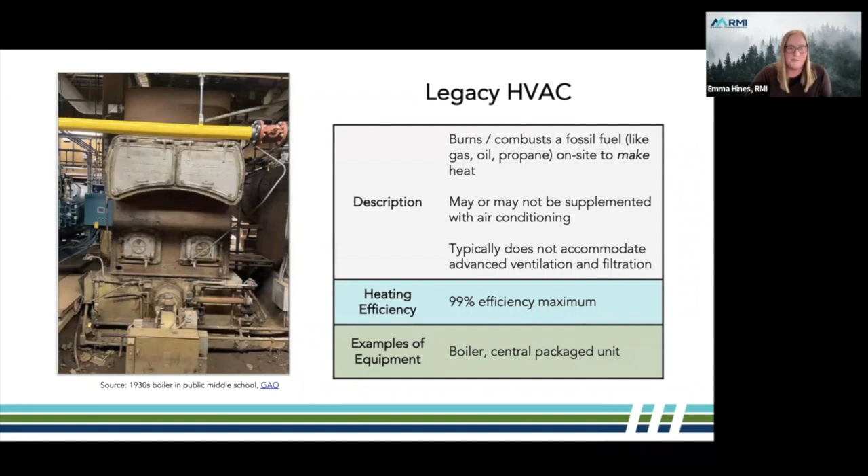On the other hand, though, modern systems, instead of making heat, they move heat that already exists in the air or in the ground. And by using this approach of moving heat, we can both heat and cool our indoor spaces with just one really cool piece of equipment, and that's called a heat pump. This approach doesn't involve combustion of fossil fuels. It can be powered with clean, renewable energy, and it's vastly more efficient than burning fossil fuels, and it does a better job of ventilation and filtration.

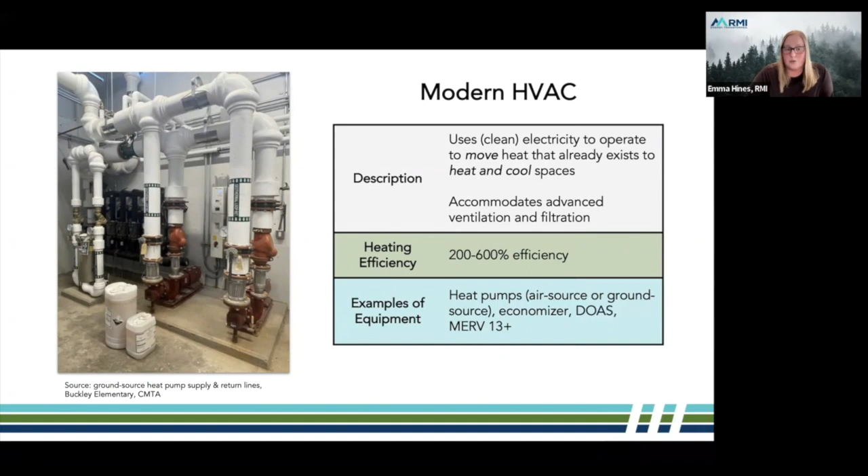This transition to modern equipment is already happening in leading schools today, which you'll hear about in a little bit, and it really is the future for all schools. Next slide. So I'll wrap up this background by sharing that there are 3 key messages that we want to deliver in today's webinar, and each of our guests will speak on a portion of these messages.

So the first big one is that transitioning to modern HVAC systems is critical to student health and learning. Our second message is that over the past few years, and especially now with the passage of the Inflation Reduction Act, the economics are changing in favor of all electric and high performance HVAC options. And then third, which is really exciting, is that we already have fantastic examples of how states and jurisdictions and school districts are taking action on this transition.

So now, with all of that background in mind, it is my pleasure to hand the mic over to our first speaker, Dr. Erika Eitland, who is a true expert in connecting building quality to student health and performance. And she is going to dive deeper into this first key message for us. So take it away from here, Erika.

Awesome. Thank you, Emma. Hi, everybody. I get to be sort of today's hype woman, I think. So my name is Dr. Erika Eitland, and I'm the director of the Human Experience Lab here at Perkins & Will. And much of my research is focused on how K-12 buildings impact child health and really what do we do about it. So to kick us off today, I'm going to go into 2 critical questions. First, the why now and why HVAC. So we're going to get into it.

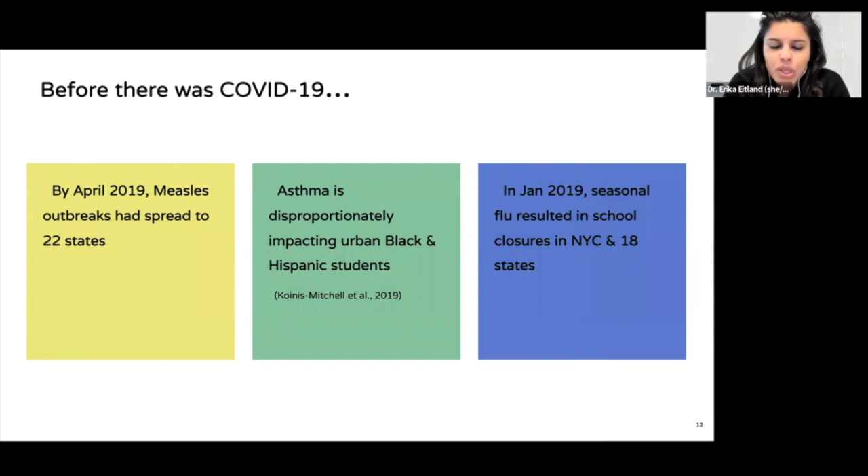So this is a really important time for us to think about, well, what is this evidence and what do we do about it? So next, let's get into the sort of why now from a human side. We all fall into the trap of maybe prioritizing the building, but it really comes down to people. And so when we think about improving our students' environmental quality, it's going to have a lasting impact on their growth and development. So every decision we make now actually helps when we think about the fact that by the time our students graduate 12th grade, they've spent 15,000 hours in their school building, their lungs have continued to develop and sort of function in a certain way.

We know that kids are breathing 50% more air. And so all of these aspects are leading to sort of an increased susceptibility that we need to be thinking about. This isn't just an office building. This is really something where the people who occupy this space make this an important priority.

We have seasonal pollutants, things like allergens, pollen, even just wildfires that we know can track across the United States. And then even the siting of the building. Is it located close to traffic, major airports, other sort of waste sites as well? So these are just important factors for us to be considering of, okay, there's the soup around us and how are we going to respond? And that's on our next slide, is really thinking about ventilation and filtration as a true spectrum. So there's 3 main goals of ventilation. One is to just control and remove some of those airborne pollutants.

The second is to dilute indoor air with fresh or clean air. And that's the assumption that the outdoor air is cleaner than our indoor air. And then the third is managing temperature and humidity. So these are opportunities for us to think that it's not, well, do you have ventilation? There's lots of nuance in that conversation that we'll get into today.

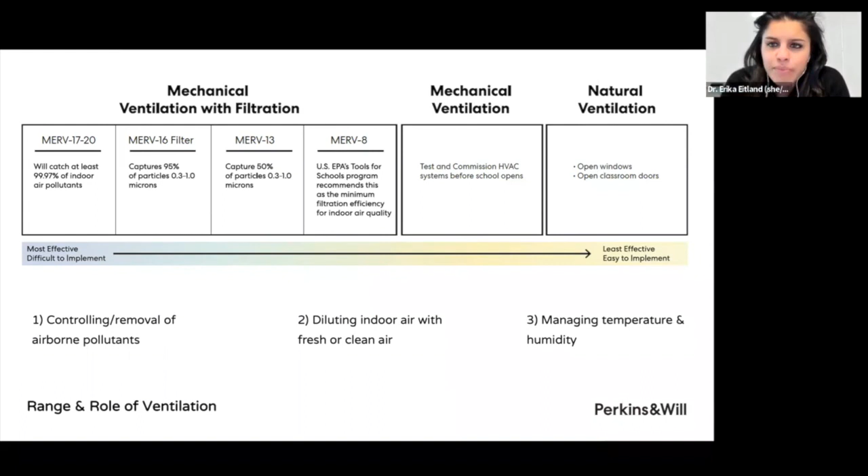So if I look at the next slide, what we see is that African American and Hispanic students, as well as free and reduced lunch students, are experiencing high levels of indoor temperature. So this isn't just about the pollutant side, it's also about the temperature that they're taking their tests. And so what we find is that compared to their white Caucasian counterparts or their more affluent counterparts who are typically in that optimal temperature for test performance, we see that there's this discrepancy. So when we talk about HVAC, it's really also an equity piece.

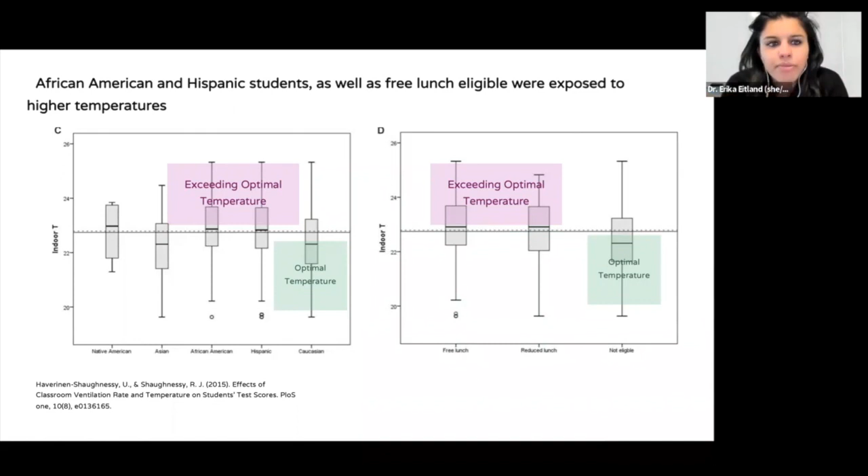And so to nerd out a little bit more on thermal comfort, on the next slide, one thing I would like us to start thinking about, and this was really critical in the Healthy Buildings work at Harvard with Joe Allen, was really shifting our conversation around thermal comfort, which is really just a subjective measure of how hot are you in this space? Are you comfortable in this environment?

And really acknowledging that children have higher baseline metabolic rates, they have higher core body temperatures, their ability to acclimatize is not the same. And so when we even think about how some of these standards were created, like ASHRAE 55, we find that they're not maybe meeting the needs of a very active third grade class, perhaps, and that they were based on men in three-piece suits. So we have to shift our thinking to something around thermal health. And so this is an assessment that's bringing in some of those personal factors, clothing and metabolic rate and physical activity.

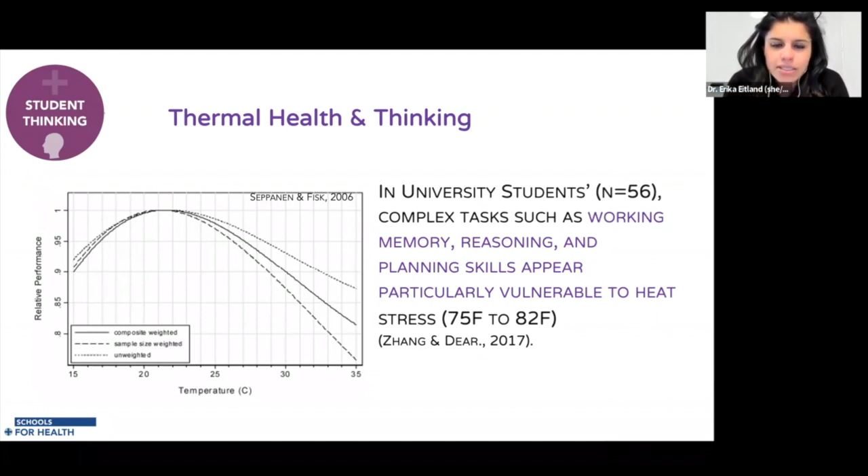And to me, on the next slide is really when we think about it in the context of climate, there's this important piece here, which is that in a study of 75,000 students, they found that students taking an exam on a 90-degree day versus a 75-degree day were 12% more likely to fail that exam. And so this is equivalent to the Black-White achievement gap. So we have a real important focus here, where if we think about the average life of a school building, how many 90-degree days are in our future? And so with that, I want us to get into the action.

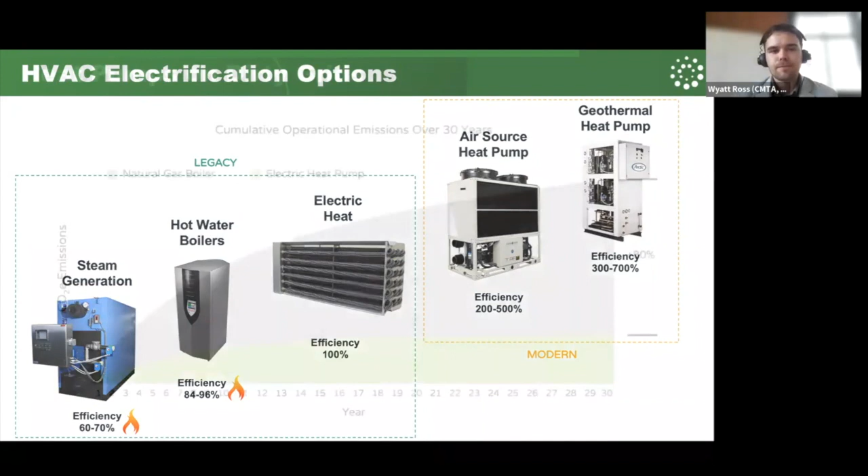And so when we look at comparing these technologies from an operational emission standpoint, because you're probably wondering, just because I electrify, where is that electricity coming from? There's still emissions associated with it. So what this is looking at is if we take a sample school in a region that currently has a fairly dirty grid, using mostly coal-fired power plants to generate electricity, and we look at switching between a natural gas boiler that's generating heat at the building versus an electric heat pump, what are the total emissions of those two systems, including the emissions from electricity?

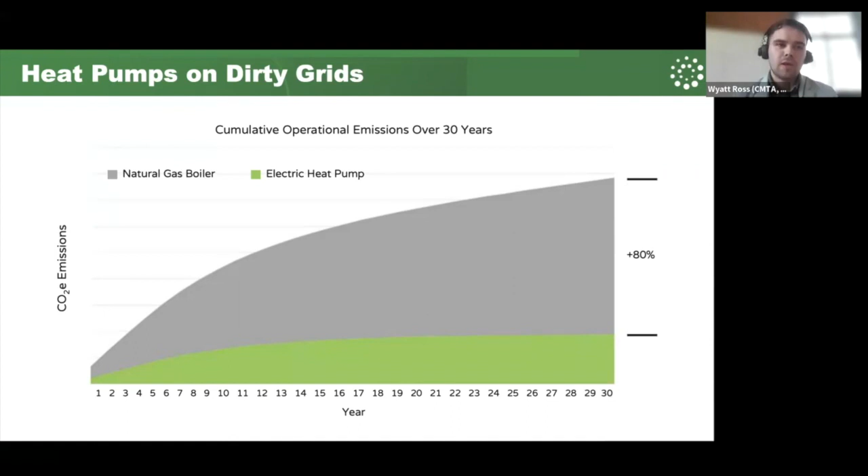And so what we see is over a 30-year period, as we expect our grid to deploy more and more renewable energy and become cleaner over time, by the end of those two systems' life, a school that deployed electric heat pumps can expect to reduce emissions by almost 80% compared to a school that chose to use a natural gas boiler starting today. And so this just gives you a sense of the scale of greenhouse gas emissions an electrified new technology HVAC system can save. Next slide.

So all that said, you still have to pay for these systems. And so how do we do that? I think it's really important to be aware of the recent legislation that has passed. I'm sure most people have heard about the Inflation Reduction Act at this point. There are two big things that I want you to take away from the slide, and then you can use the rest as a reference.

But the big thing is that in the recent past, these tax credits have existed in some form or another, but they have not been available to public K-12 schools. And so that has changed with this legislation. So now there are incentives available that can help cover the cost or any premium associated with these modern technologies.

And then the other big change is that for some of these technologies, the tax credit base has increased from 10% in the case of geothermal heat pumps up to 30%. And there are additional incentives that can potentially raise that. So what that means is that not only can these heat pumps and modern technologies meet a lot of the technical needs of heating and cooling, but they can also meet some of the financial needs that districts are facing. Next slide.

So again, we won't go into all of the technologies that are covered by this bill, but really the big one for our conversation today is ground source heat pumps. Also solar photovoltaics are covered, battery storage, some microgrid technology, and a whole slew of other technologies that we won't have time to get into. Next slide.

And so just real quickly, I wanted to jump into a case study. This is a school that Sarah mentioned that we worked on in Connecticut, a net zero energy renovation. It did not leverage the tax credits, but this case study proves out what it would have looked like if they had, and how beneficial that could have been. This is a life cycle cost analysis over 25 years. If we just compare to a code minimum system that we could have deployed, it would have cost roughly $13 million over the course of that system's life to own and operate.

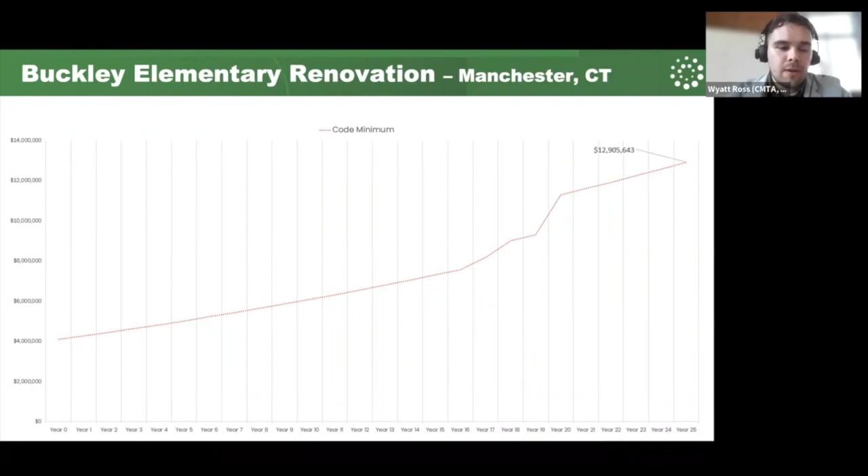And so if we compare that to the geothermal system that they went with on the next slide, you can see that we were able to provide them with a system that had almost a $3 million savings over the course of the system's life. The only downside is that it did have a small premium associated with going with that HVAC solution, and that was going to result in a 6-year payback.

And so the key takeaway here is that before the tax credit, this HVAC system still made a lot of sense and had a lot of merit for all the health reasons that Erika was talking about, as well as the energy savings associated with the system. But with the tax credits, it almost becomes a no-brainer: first cost, best option, and then all of those ancillary benefits as well. So this just shows the magnitude of impact these credits could have when looking at these options. Next slide.

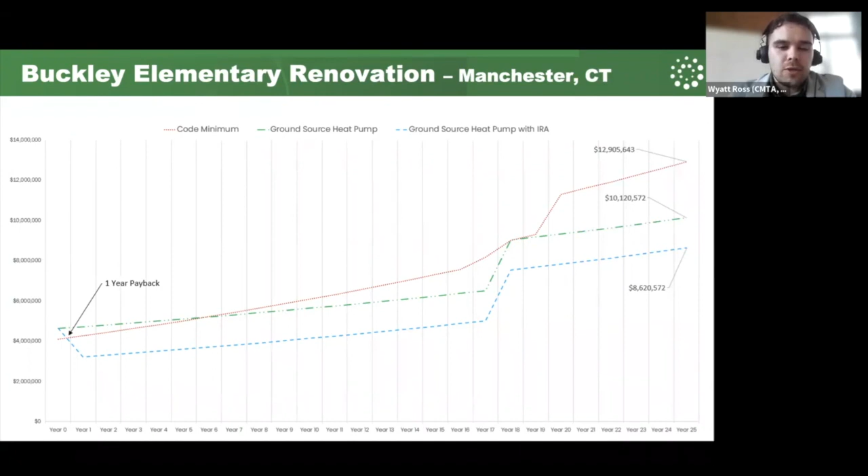So, quick sustainability playbook here. How do we actually go about achieving and implementing these systems? When you have a project come online where you're looking to maybe do an HVAC retrofit or new construction or whatever it may be, step one is that we really need to make sure that we're asking for the right qualified people that can design and deliver these systems. So including language in our RFPs that talks about performance outcomes, whether it be the health and wellness outcomes, the energy savings, the system types. If you're asking the right questions in the RFP, you'll bring people to the table that can deliver those solutions.

The second thing is during design. Design of any school can be messy. So you have to have advocates both on the design team side, with the architect, the engineers, structural contractors, and on the school district side that can continue to ask the right questions, make sure that we're talking about the right things and that we're focused on achieving those objectives that we talked about today.

The third thing, and this one's really important: as we transition to more and more modern systems and away from traditional systems where contractors and estimators are more familiar, that transition can be a little bit of a pain period. Estimators, if they aren't super familiar with these new systems, might put in some buffer or safety factors associated with the cost of these new systems, and that can inherently price out these systems, maybe unintentionally. So what we want to do is make sure that we're getting early pricing sets that are very detailed, dig into the weeds and make sure that we're getting the right information so that we're not making any assumptions that might be wrong and falsely price out systems that we would like to keep.

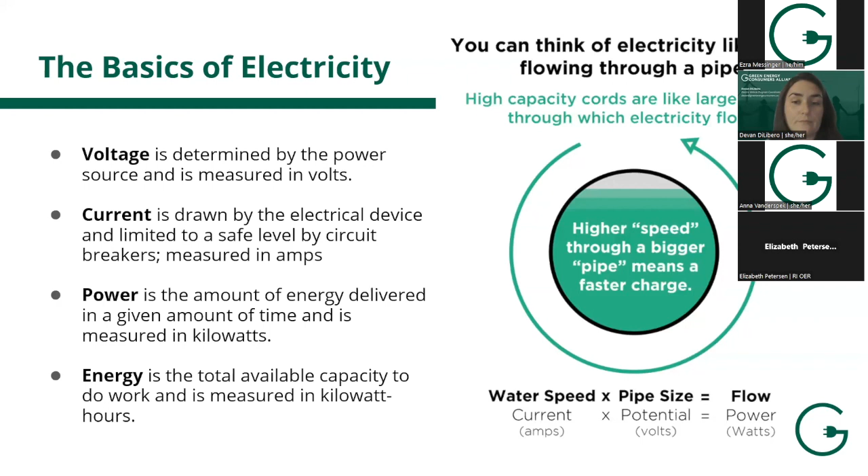Next, we are going to talk about driving range and charging speed because they're the two biggest questions that people have of electric vehicles. The first is how far can I go? So the size of the battery determines how much energy you can store in the car. The more energy, the more driving range. Efficiency describes how good the car is at converting energy into miles driven. Bigger cars are usually less efficient, but efficiency can vary depending on road conditions, driving style, and how fast you drive.

Unlike gas cars, EVs are more efficient at city speeds and stop-and-go traffic. The weather. It's surprising how big of an impact the ambient temperature makes. Batteries have an ideal operating temperature. In the winter, you need to use energy from the battery to keep it at a correct temperature, which cuts into the range. In the summer, however, when weather is nice, you'll get way more miles out of your car than is stated by the EPA estimated range for any particular vehicle.

The second one is how fast can I charge? Power source. Charging is basically the process of transferring energy from an outlet to the battery for storage. So the power source is a major factor that limits how fast you can charge. You can't draw more power than is available from the source.

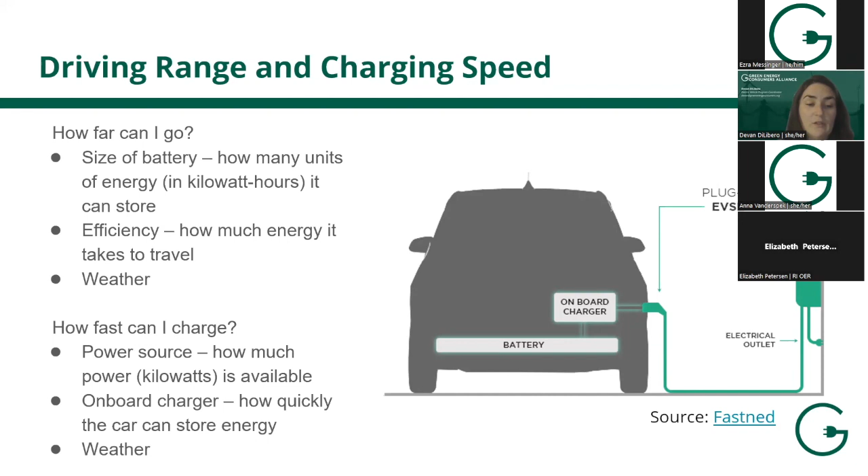Before energy can be stored in the battery, the power has to be converted from AC power, which is the power that the outlet spits out, to DC power, which is the power that the devices use. That's what the onboard charger does. So even if you're plugged into a charging station that delivers a ton of power, the car can only process all of that power so quickly. And this is especially important to think about when it comes to DC fast charging, which we'll talk about in a little bit. And if you have any more questions on this, please feel free to put them in the Q&A. Finally, weather affects charging speeds too, in the same way it affects driving range.

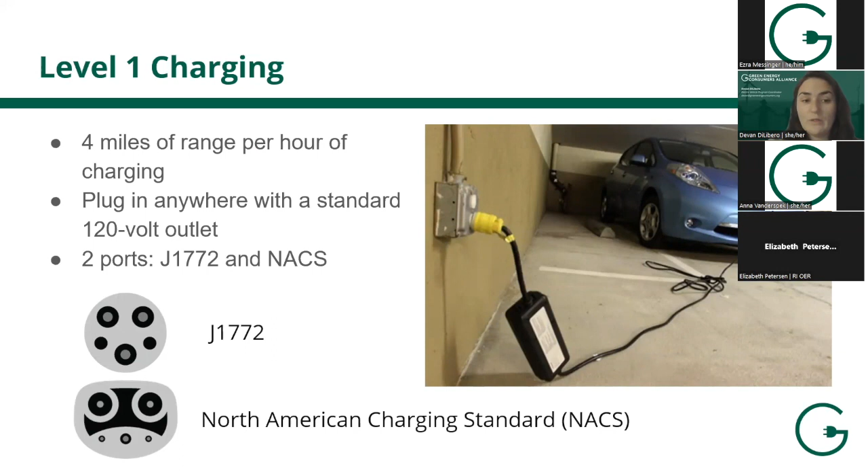This is important to know because it kind of helps you figure out what your driving needs actually are and what your charging needs are. And as a reminder, you're not going to be sitting there with your car. It's going to take you like 10 seconds to plug it in, and then you're going to go about your day or your night. So it's really not too much of an inconvenience.

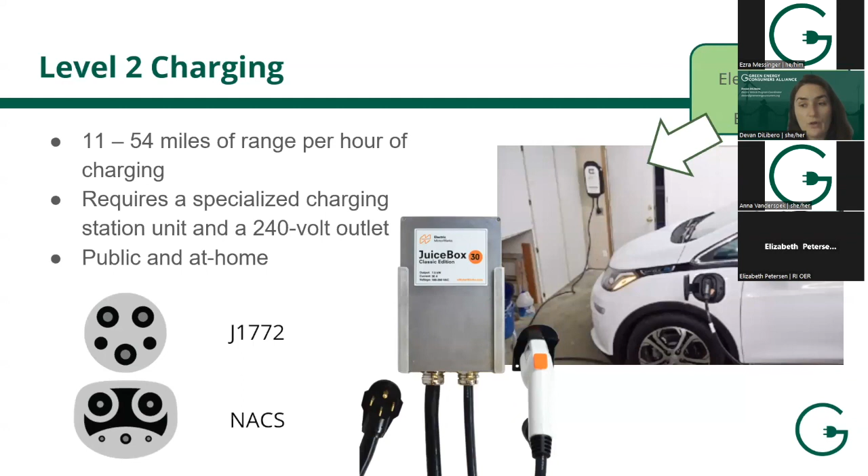Now, here's what I was referencing before about the Tesla Charging Partnership and the North American Charging Standard, or NACS. So like we said before, Tesla uses one port for all 3 levels of charging. And in the last couple years or so, they took the patent and opened it up for their charging port in the hopes of becoming, like the name states, the North American Charging Standard, so more manufacturers would adopt their charging ports.

So far, we have quite a few manufacturers who have agreed to adopt the North American Charging Standard port, and those are Ford, Rivian, GM, Acura, Fisker, Mercedes-Benz, Nissan, Honda, Jaguar, and Polestar and Volvo. Now, this is going to change. It's probably going to be a list that grows very quickly over time, but for right now, these are the manufacturers who have agreed. What this generally means is that most of these manufacturers will follow the following timetable.

In spring of 2024, all of these manufacturers listed will have adapters available for their vehicles that are currently on the roads, which means that they can use any of Tesla's 12,000 plus supercharger stations across North America, which is huge because a huge advantage of having a Tesla is the charging station network. So it opens up a lot of different charging opportunities for folks who wouldn't normally have that. I mean, the charging infrastructure without NACS is pretty extensive, but this is even greater and it gives you more opportunities for charging.

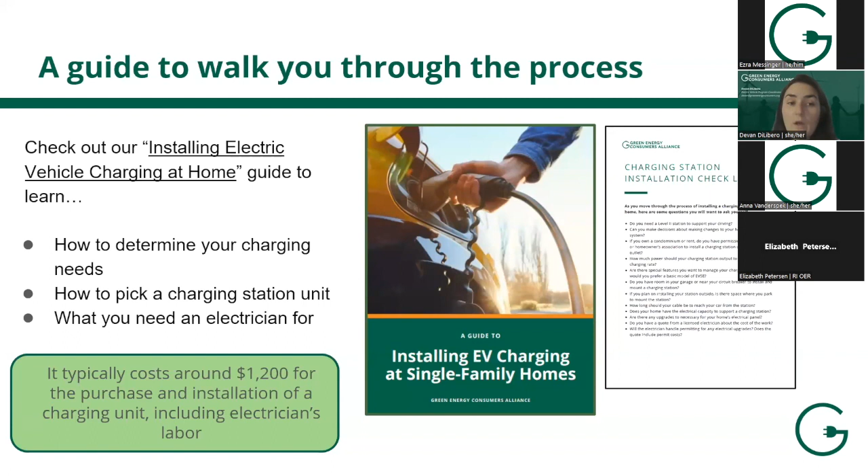And then we'll also tell you what you need an electrician for, and you do need an electrician for this, but it's not a super cost prohibitive thing to do. With the electrician's work and the cost of the unit, it should only cost you about $1,200 for the whole process. Now that's with no other electrical issues that need to be fixed in order to install this. So it should be fairly simple. Next slide, please.

And now you might be thinking, well, that's great, but I don't live in a single family home. I live in an apartment or a condo. We also have a guide for you as well. This is something that you can hand to your landlord or whomever to say, this is why it's such a great amenity. This is why you should install it for us. And we also have another guide that tells the landlords how to go about this process and if there's any incentives that they can take advantage of to install these charging station units for their residents. And I believe I'm going to now hand it over to Anna.

Thanks, Devan. Before I jump into the next slide, I'll say that there are existing incentives and new incentives coming soon to help bring down that cost of installing charging, and we'll talk about that later. So don't fret. There's ways to bring that $1,200 down. But first, at this point in the conversation, we often get the question, how much does it actually cost to charge?

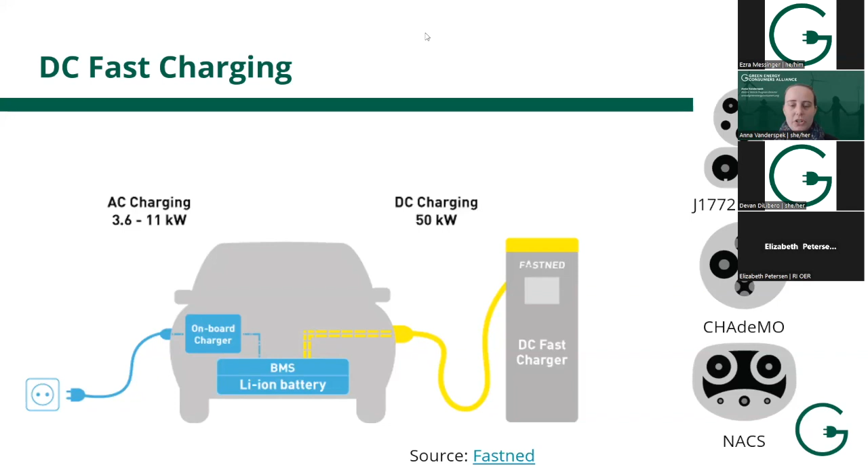Moving forward, a lot of the new vehicles that are going to come out are just going to have the North American Charging Standard, which is a good thing in the sense that it's simplifying. We won't have to talk about 3 different plug types anymore. It'll just be, this is the DC fast charging plug for most manufacturers.

Often the question we get with DC fast charging is how fast is fast? And the answer there is that it depends, of course, as always, on lots of different things. So the first thing that matters is the station power. So a lot of the charging stations that are DC fast charging stations that were built in the last couple of years were somewhere between like 50 and 70 kilowatts. So that's how much power they could output.

The second thing that determines how fast you can charge is the state of charge. So we have a whole slide dedicated to this in a moment, but if a battery is basically empty, it will charge a lot faster than if it's very full, because one thing batteries want to avoid is getting too hot. So if a battery is over 80% full, it will slow down how fast it's charging to maintain a beneficial temperature. So how full your battery already is determines how fast you can fast charge.

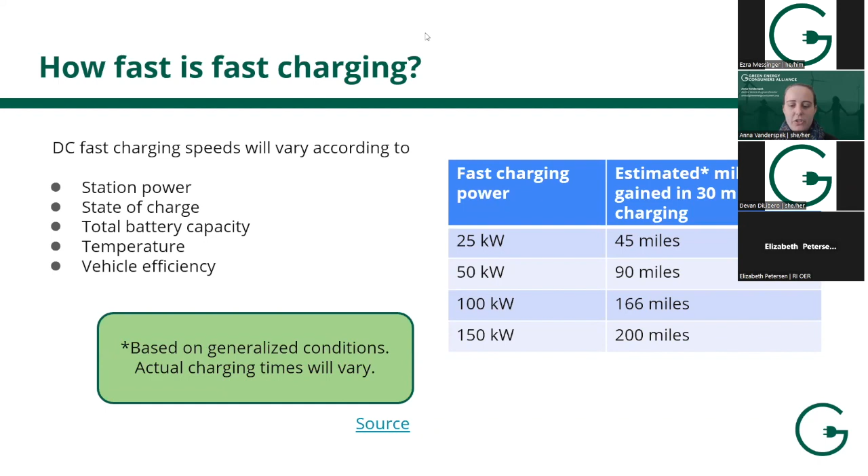We have this information on our shopping tools. So if it's very important to you to have an EV that can charge very fast on DC fast charging, you'll be able to see on our site which vehicles can receive power at over 150 or up to 350 kilowatts.